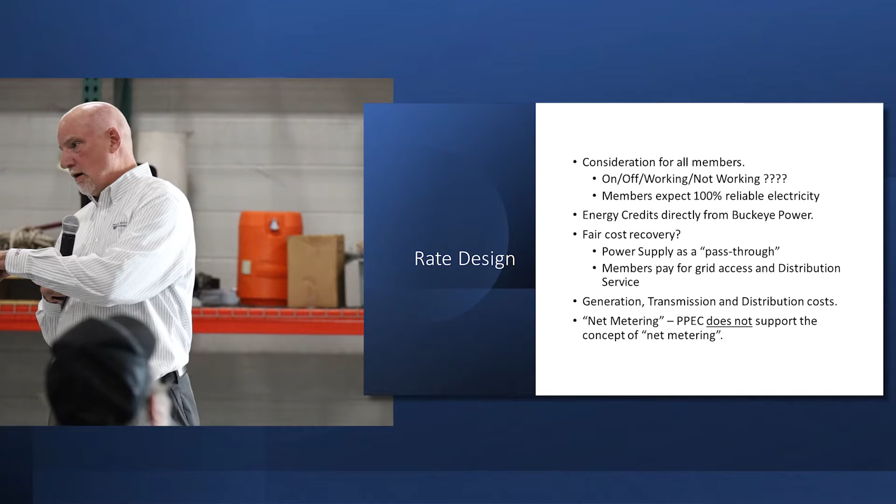Okay, so we'll get into a little rate design philosophy. First thing is, when we're talking about rates, we have to think about all the members, not just members that are large power users, small users, people that want renewable energy, that don't want renewable energy. We have to think of everybody, right?

One of the things we have to consider is systems like renewables, they're on, off, working, not working. That really doesn't impact us because we have to have connection and supply regardless. Because you want your power on 100% of the time, whether it's your own renewable energy or energy from us. So we have to be available and ready 100% of the time, and we have to have the capacity 100% of the time, which means we have to have a transformer sitting out there that's energized, ready to serve your home. We have to have a substation that's receiving energy, ready to supply your home. So that's the first consideration when we're designing rates — we have to be able to meet your needs whenever you need it, doesn't matter how much.

If your units are running, say you're generating some solar and using it, you're buying less from us — well, when the sun goes down, your usage may go up. We have to be ready to supply that all the time, whenever. You may take your unit offline to do some work, we have to supply that, we have to be ready. So we have to have our system capable all the time.

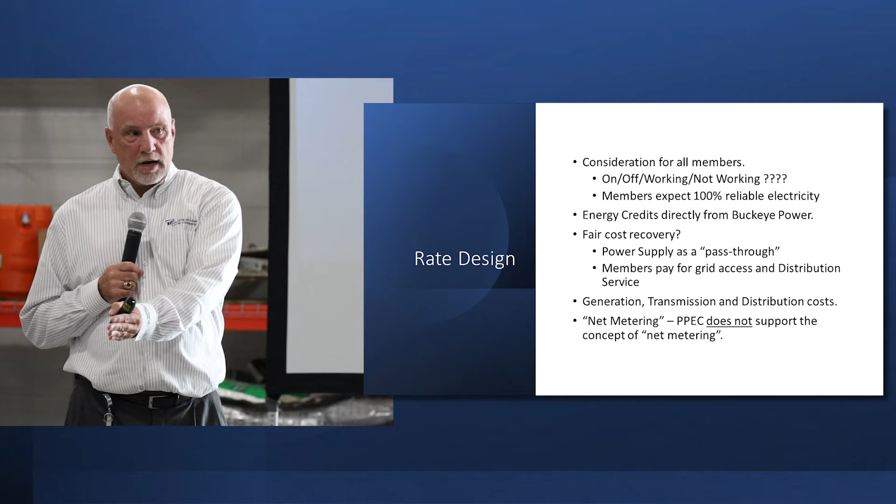Again, when we talk about fair cost recovery, when we look at the electron, the actual electricity that you use at your house that comes from Buckeye, we don't look at that as something we want to earn margin on, because we're not building to replace that. What we want to earn margin on is the distribution side, which is all of the facilities from our substation to your house that we use to serve you. And again, that's got to be available 100% of the time whenever you need it, so we want to have our margin because that's the equipment that wears out over time.

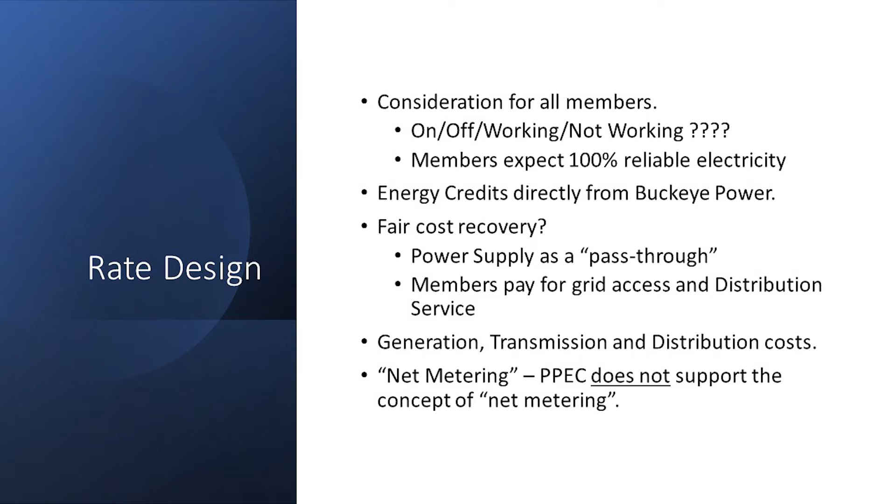That's the poles that after so many years have to be replaced, that's the wire that has to be replaced. There's millions of little pieces of hardware between that generating plant and your house that fail every day, and those have to be fixed, they have to be replaced. We have to have a systematic maintenance program to replace and upgrade that stuff before it breaks, hopefully. So that's what the service charge on your bill is for — that's what that recovers. The energy then just becomes a pass-through.

So whatever we pay Buckeye is what you pay — that's our long-term goal. If you look at your bill, several years ago we separated it out into generation, transmission, and distribution. It works out about 70-30: the generation and transmission components are roughly 70%, maybe 65% depending on your usage, and the distribution cost is 30-35%. That's roughly how it works, but you can look at your bill.

Net metering, we do not support that. That concept has been out there a long time, for as long as renewables have been out there. Basically what net metering means is the meter runs forward whenever you're buying electricity from us, and runs backwards whenever you're generating power. So in effect, your meter gets decreased at the actual cost to us, which is not the credited cost you get back. The net metering is actually at the full retail rate instead of the wholesale cost of the power, which would include all the distribution costs we're talking about in that credit. That's why we don't support it.

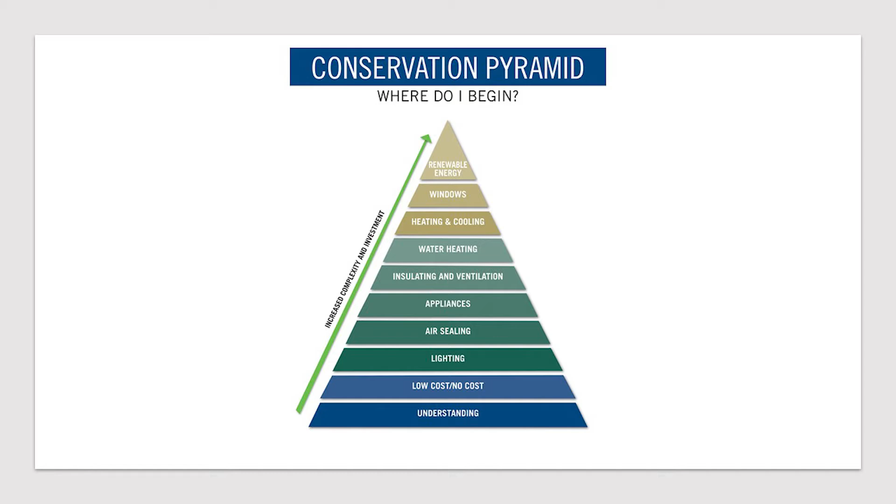At any rate, what we have to understand here is that there is a tremendous cost when you don't follow these steps in order. So the big thing is try to do what you can in this order, low cost, no cost, all the way up to more expensive. Really, on the heating and cooling system, you could save 20-30% on your electric bill a year just by upgrading that.

So just think about those things first, and you could see a return much sooner than putting in windows in your new house, or renewable energy. Okay, so that's just, I wanted to start down at the foundation level of what this conservation pyramid means and how we're going to go through these slides.

Okay, so the NREL, the National Renewable Energy Laboratory, did a really good study in early 2000, published in 2006. This chart is showing by state a comparison of solar power potential — how good is solar power in each state. The sun index is defined as an index of the amount of direct sunlight received in each state, accounting for latitude and cloud cover. The amount of direct sunlight was derived from numbers provided by the National Renewable Energy Laboratory Renewable Resource Data Center. The sun index was calculated as the average number of peak direct sunlight hours per year from 1960 to 1990.

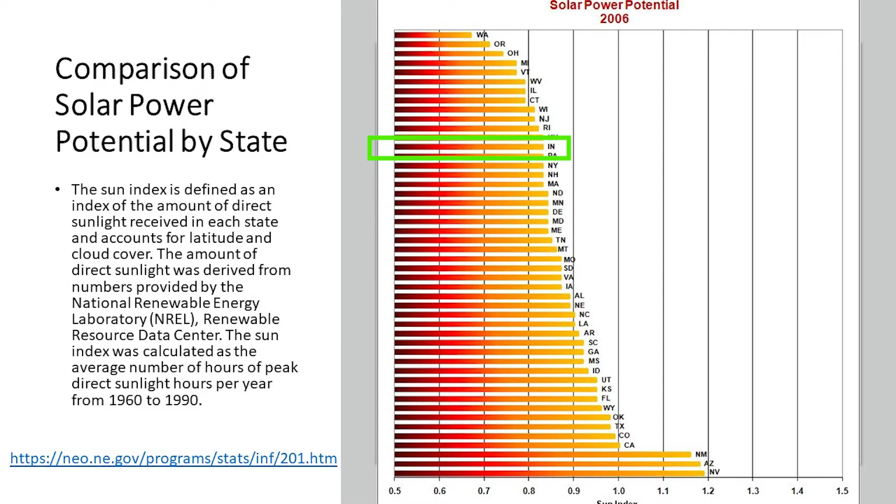And this is important because I want to show you, right up here, the state of Ohio in terms of solar potential — it's the third worst state of all 50 states in this country. And Indiana is, I think, the 13th worst. So it's just not great. There isn't great sun in this area, in the Midwest in general. Why am I bringing this up? Well, how is solar viable in our area? Why are people putting in solar panels everywhere if the solar potential is not very good in Ohio?

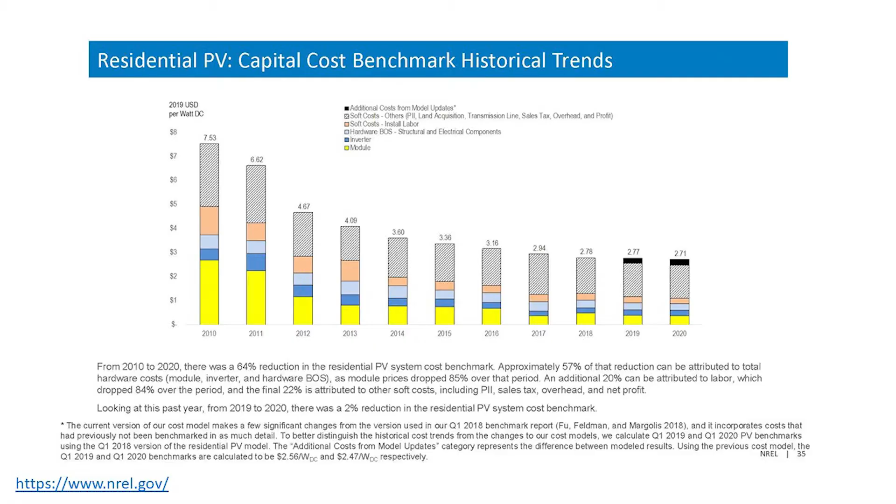Well, it's pretty simple. Over the last 10 years, the cost of solar installations in general has gone down 64%. In 2010, the cost per watt installed was $7.53. Fast forward 10 years later, it's about $2.71 per watt installed. Today it's a little less than that — in our area they range between $2.40 and $2.50 per watt, depending on your application and whether it's residential or commercial. Generally speaking, the larger you go, the more cost effective it is. I just wanted to show you this graph because it shows how far we've come in 10 years in terms of cost. That's why it's starting to make a lot more sense in our area in terms of cost versus savings, and the return on investment is worth it.

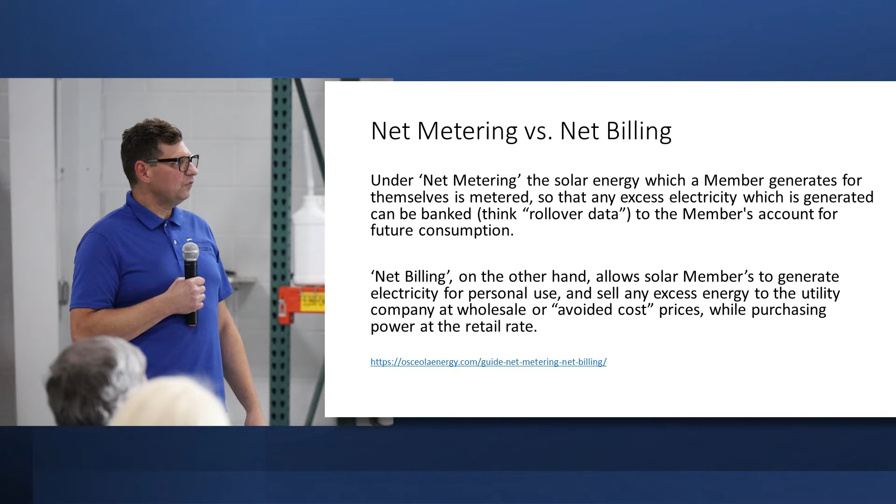Okay, so net metering versus net billing. George was speaking earlier on net metering. Under net metering, the solar energy a member generates for themselves is metered so that any excess electricity generated can be banked — think rollover data on your cell phone plan — to the member's account for future consumption. Well, the co-op doesn't do that, that is not our practice. What we do here at the co-op is net billing. Net billing allows solar members to generate electricity for personal use and sell any excess energy to the utility company, us, at wholesale or the avoided cost, which is the Buckeye Power cost — we'll go over that in a minute — while purchasing power at the retail rate. I'll explain that a little more going forward.

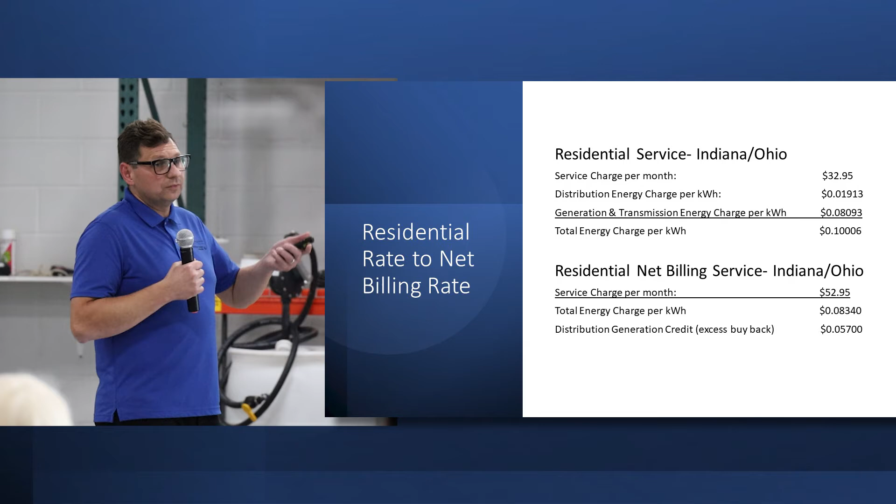So this slide is residential rate going to a net billing rate. I'm going to assume everybody here is on a standard residential rate with Paulding Putnam Electric. If you are, your rate looks like this, the top portion. The service charge per month is $32.95, that's a fixed cost — it doesn't change from month to month. It's there every single month whether you use 1 kilowatt hour or a lot of kilowatt hours. That cost is essentially a fixed cost to pay for our system, equipment, material, that kind of thing.

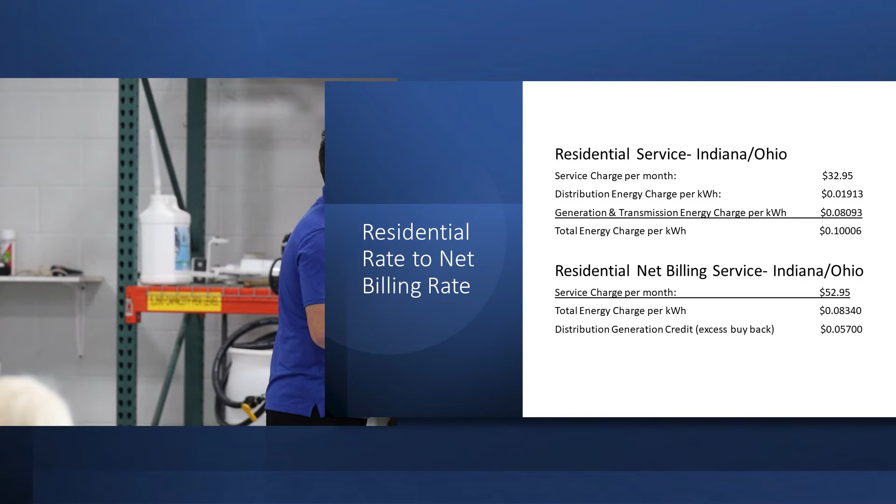And then below that is our distribution energy charge per kilowatt hour, it's less than 2 cents. And then our G&T energy charge is 8 cents. Combined, we're paying roughly 10 cents per kilowatt hour — you're all paying roughly 10 cents per kilowatt hour if you're on our standard residential rate. Now, if you go with a solar system, you'll go to our residential net billing rate, where the biggest differences are: the service charge goes up 20 bucks to $52.95, yet the total energy charge per kilowatt hour goes down to 8.3 cents from 10 cents.

And any excess buyback is at 5.7 cents. That's the avoided cost, that's what would come back onto our lines. That's what Buckeye Power would buy back from you guys.

So this is a good snapshot of what it looks like now, and what it would look like if you do go with a solar system.

This is very critical, the reason why I'm explaining this is because I would say 9 out of 10 solar customers that we connect don't have a clue that this is happening. They just don't. So they're surprised, I guess.

It's no loss, you're not gaining or losing anything. It's the service charge goes up because there's increased responsibility and increased cost. And then what we did was we just lowered the kilowatt hour charge essentially, so it's essentially flat.

Okay, this next graph is solar usage patterns. This is a 24-hour period here. This graph here is depicting a 24-hour period of solar output, this blue line, and home usage, this orange line.

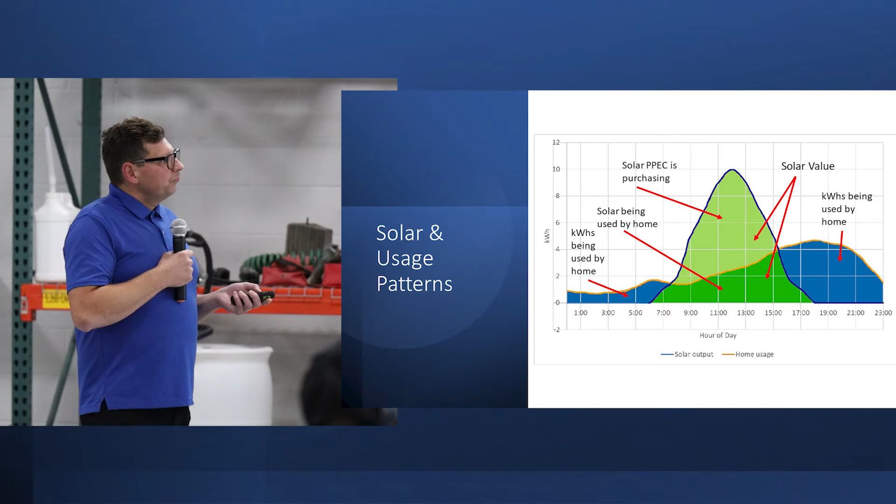So this is important too because my next slide will explain to you how the net billing portion of how your system pays for itself. I'm going to explain.

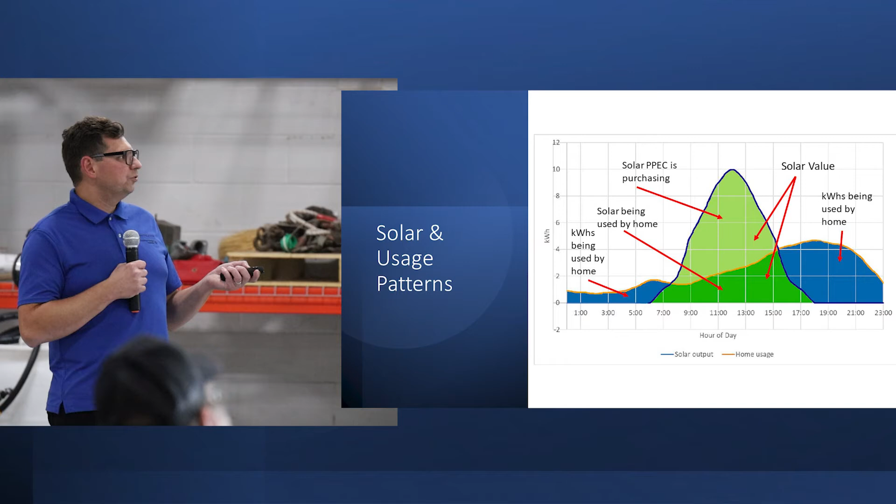So when you use power from the co-op, this blue portion here is using power from the co-op. And then when the sun starts to come up, you can see solar being generated right here. And then this dark green part, where your home would be using electricity, your house is using that power from your solar system that you are generating.

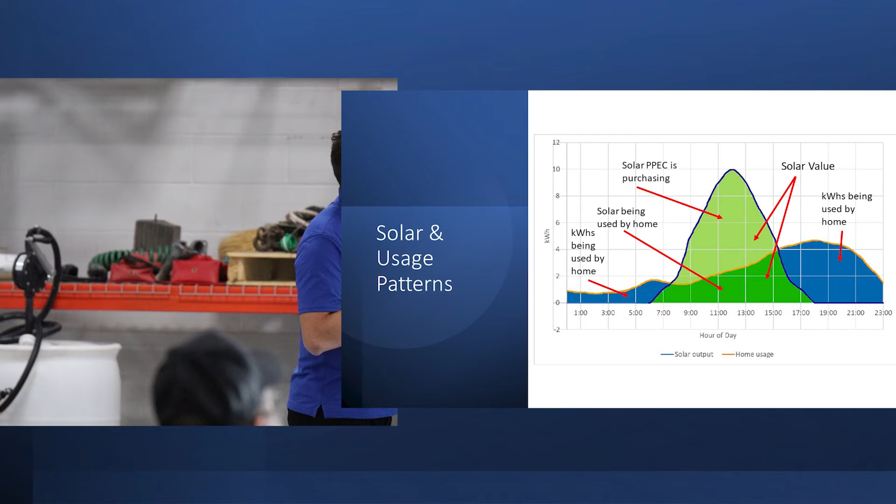So if you are actually generating more than what your home is using, then the solar, this is the solar that PPEC will start purchasing.

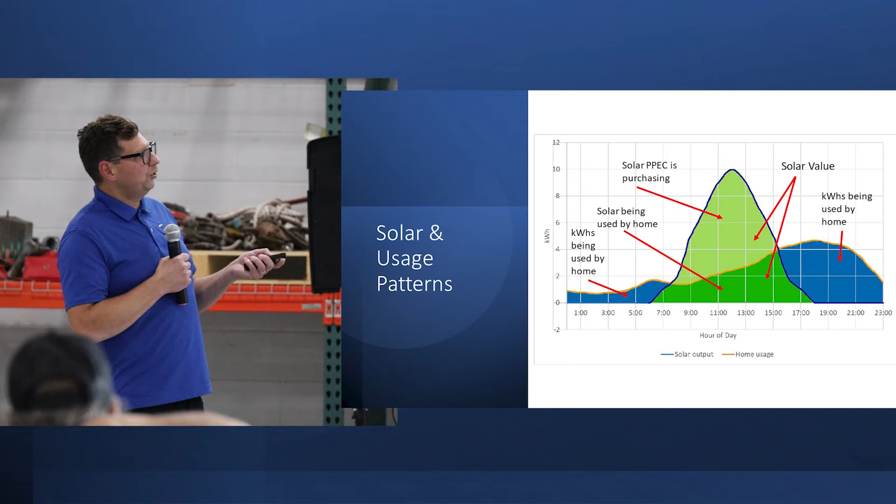These right here, this graph is showing power right here during the day. That power is coming back onto our system. All the while you are using all of the power that your solar array is generating.

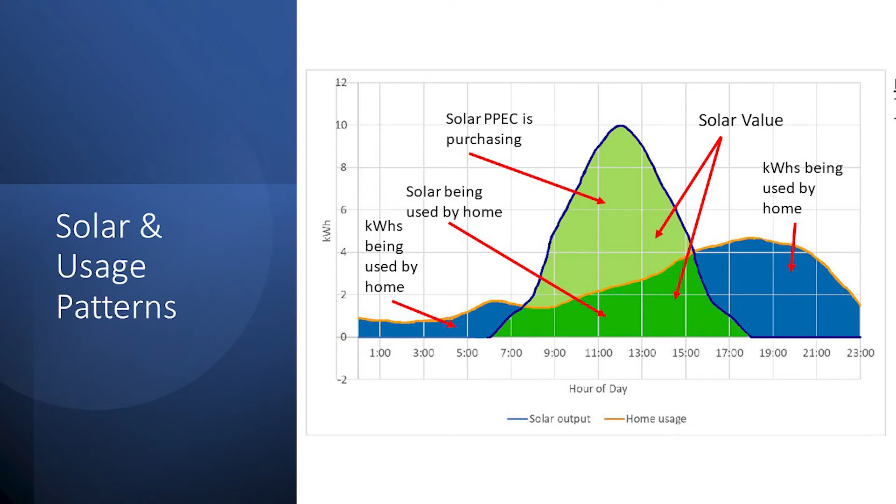When the sun starts to go down, kilowatt hours are being used from the co-op right here in blue again. So this is important too because I'm going to start talking about paybacks and how that system can pay for itself. So this is a typical scenario for net billing with Paulding Putnam Electric.

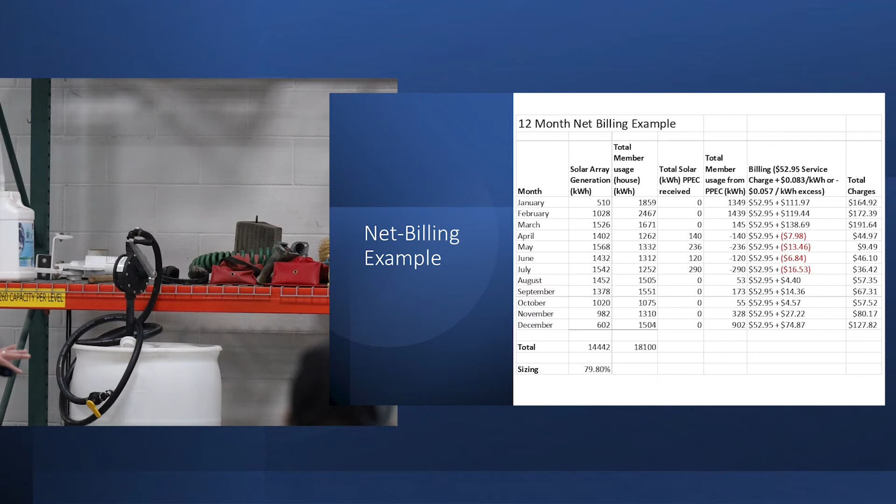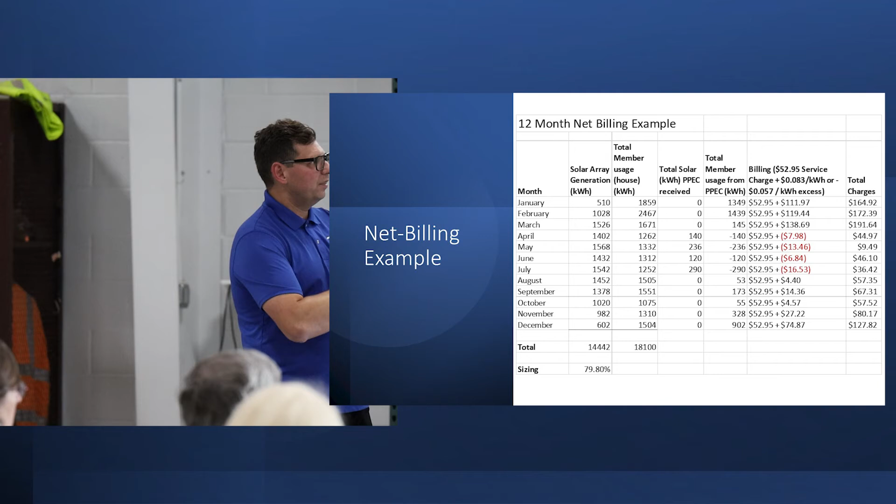Okay, now this slide might look a little intimidating, or it might look like a lot of numbers, or you can't see it very well, but this is a net billing example of a 12-month electric consumer, a member of ours, that would have a solar array system, for example, connected to us, obviously built at their home, taking power from the home and putting back onto our grid.

So, basically, if you guys can follow me here, this row right here is a theoretical about 12 kW system that has been installed on this member's home.

Okay, these are actual kilowatt hours that the house is using. So for the month of January, your theoretical generation, your solar system that you have outside your house, in your yard, generated 510 kilowatt hours. All the while, the house used 1,859 kilowatt hours. Okay, you see that second row?

Well, the third row is the total solar that you sold to Paulding Putnam, or that we received from you, of over excess generation, which is nothing, because you actually netted 1,349 kilowatt hours. So you used 1,859, your solar system generated 510, you used all of that up, and it netted to 1,349 kilowatt hours, and that's what you paid for.

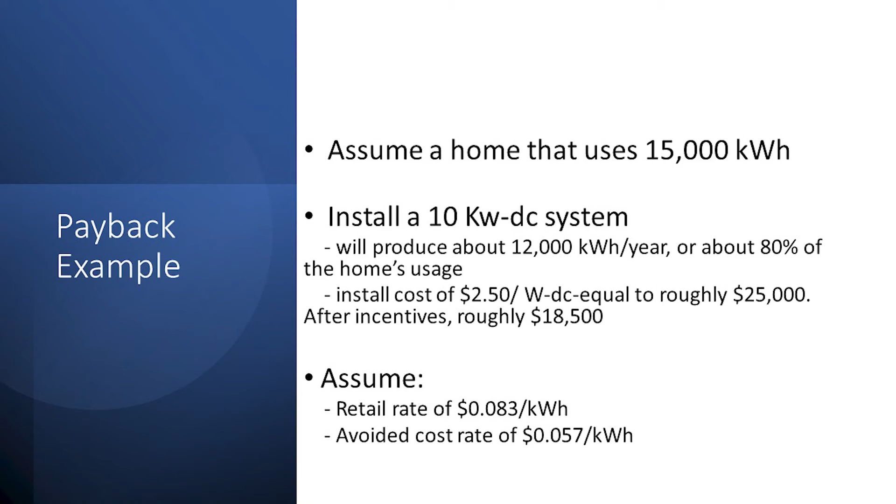So if that 10 kW system I just described at a 15,000 kilowatt hour a year home, if 7% of the solar kilowatt hours are sent back to the grid, then this is what you should expect in terms of solar values.

If we go back a few slides, this part right here, this is what's going to be paying for your system. This is your solar value. 7% of 12,000 kilowatt hours is 840 kilowatt hours, credited at 5.7 cents, that's 47.88. 93% of the 12,000 is 11,160, valued at 8.3 cents, which is 926.28. The total annual solar value is right here, under $1,000.

So if you do simple payback, it's 18.9 years on an $18,500 system, with just the 26% tax credit. I'm not familiar with what other incentives there are, if there are any others, but this is just a simple payback example.

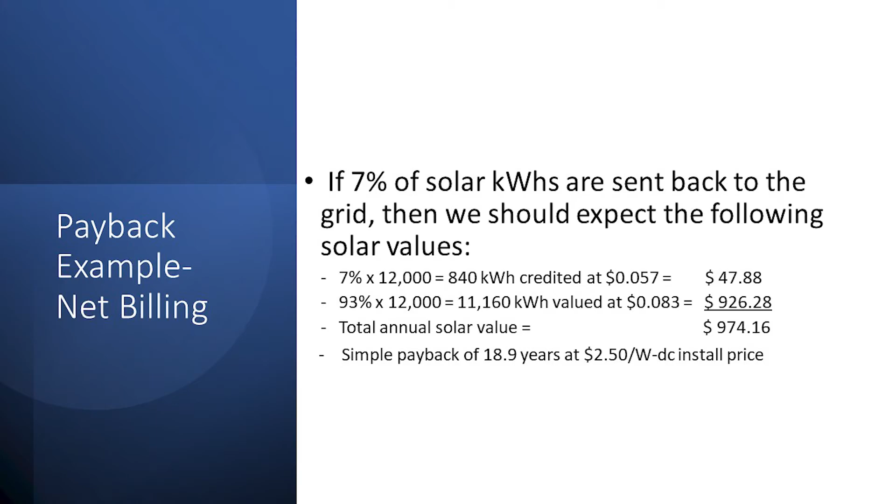So this is what you should expect a system to generate. Let me go back a second here. Your objective should be to use all the kilowatt hours that your system generates, because it is valued at 8.3 cents, not 5.7 cents. That return will happen much more quickly if you use all these kilowatt hours and not sell them to us at 5.7 cents. That's the moral of the story here.

So, step-by-step process if you do want to go with this system. Before choosing a solar system, be sure your home is as energy efficient as possible. If you can reduce your energy costs at your house 30%, 20% by implementing energy efficiency upgrades, like having me come do an energy audit and tell you how and where to improve your home for 20% or 30% savings, you can install a system 30% smaller. When you're talking thousands of dollars, that makes a big difference. It just makes all the sense in the world.

So investing in energy efficiency provides a faster return on your investment. Things like we were talking about on that pyramid. Almost every time, insulating and air sealing, lighting, that stuff will make a return on your investment much more quickly than a solar system. You will reduce your overall energy use, and you may reduce the size of the PV system you put in.

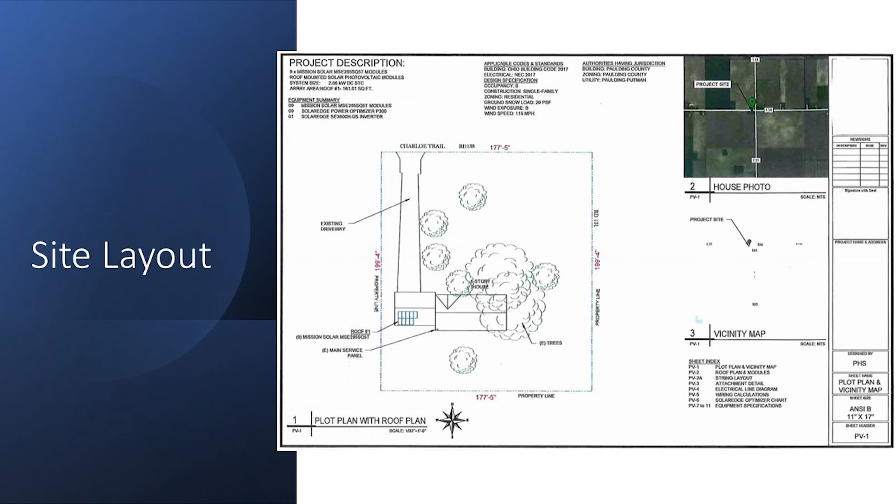We want to see where the solar panels are and how it's going to get interconnected. It doesn't have to be like this, it doesn't have to be an AutoCAD drawing. If you're doing it yourself, you can draw it on a piece of paper. We just want to know the proximity of where this is going to be, the number of panels, and where your meter is located and how you plan on interconnecting to it. Another example would be this layout as well. You can see this is a house, I'm assuming that's a garage, and you can see where the solar panels are at.

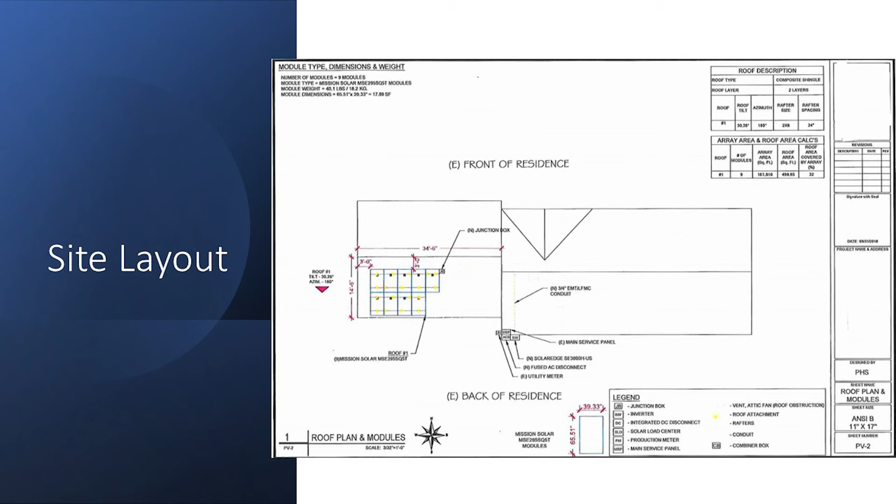Down here, that's where the meter and the disconnects and all the integrations are happening. The next diagram we want to see is how you have this all designed as far as interconnecting. How is it wired up?

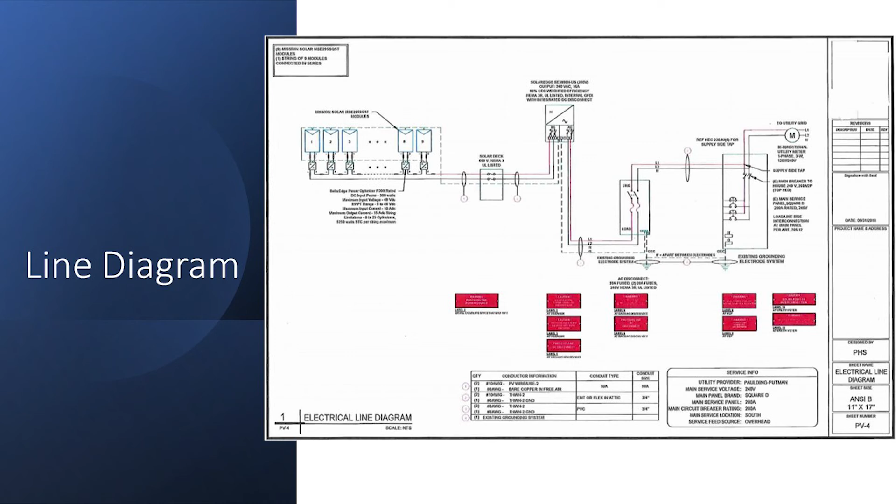Gotta go back. You can see we got the solar panels over here. It's going to go into an inverter, and then eventually to a disconnect, and then into your panel, and then back to the meter. We want to make sure that it's wired properly, and I'll get into that detail in a little bit.

But these are some of the things that we were inspecting in the application. You can't really see it, but these little red squares, that's labeling. I'll discuss that here in a little bit. Labeling of what everything is out in the field or at your home is very important.

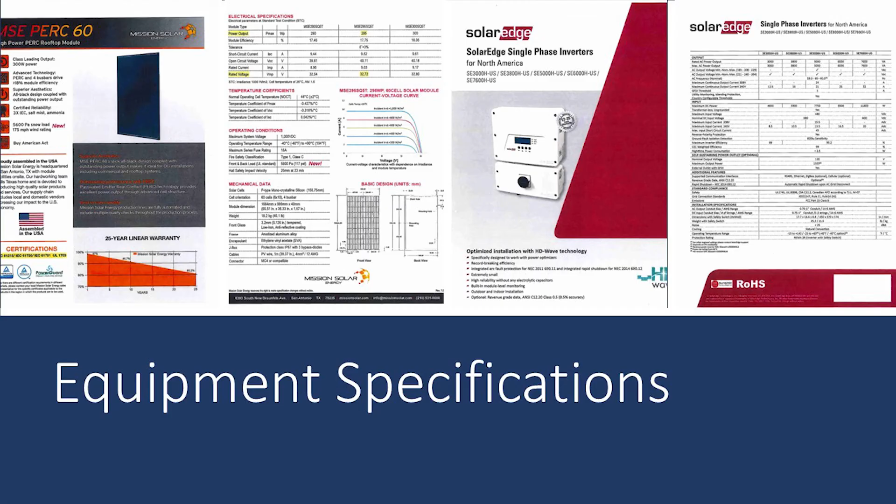Next thing in the application, we do want to see what manufacturer you got on the solar panels. We don't typically care what brand it is, but we want to know what the wattage is, because that can dictate what size solar array you have out in your field. If you have 20 panels and they're rated at 300 versus 425, that's a big difference. So we just want to know what kind of material you're using.

Same with the inverter, what converts it over and phases it together so that it can be backfed on our lines. So we just want to look at the specifications of the equipment.

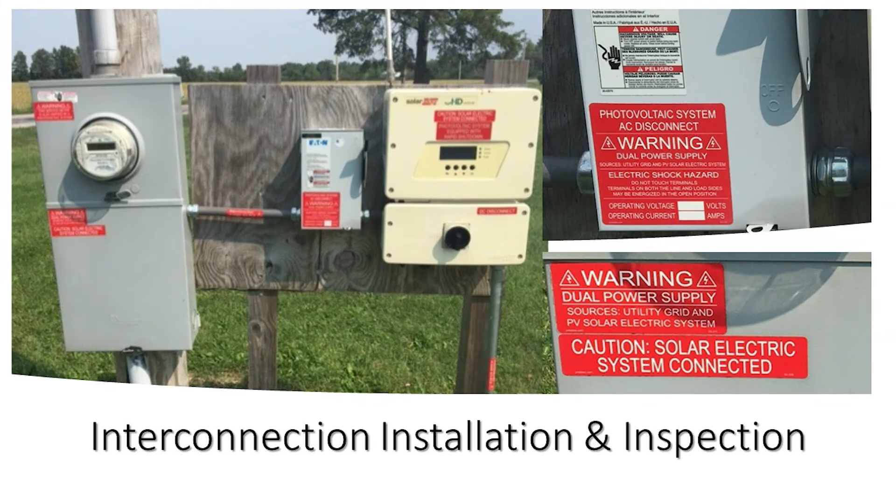All right, so let's get into what it actually looks like in the field. This is just one example. There's many different ways of wiring it up. This is an outdoor application. You can see there's 3 main components that we look at on it besides the solar panels.

So the first one is your inverter. That's basically what inverts it from DC to AC and makes it more usable power and phases it into our grid.

So one thing that a lot of people don't realize is if you don't get power from the utility, okay, these are not a generator. This is not a battery backup system. This is not a generator system. So you actually have to have power to produce power.

You can't just take two wires and stick them together and expect them to phase together. That's what this inverter will do. It keeps everything, the sine waves, all equal. It keeps everything solid so that everything works in harmony. If you don't have that, you just got a big arc. Okay, so that's what this little box here does.

It keeps everything stable. It's actually more of a monitoring system for your entire system. You can see what the DC voltage is compared to what the AC voltage is coming out. If you want to get more technical, we can talk more.

The next piece of the device that we're really concerned about, and is very important to us, is a service disconnect right next to our meter. So in this application, you got the inverter, you got the disconnect, then the meter base. But we really want that service disconnect within viewable distance, within 6 foot of that meter. Now, for several reasons. So that service disconnect, so I'm going to jump ahead here.

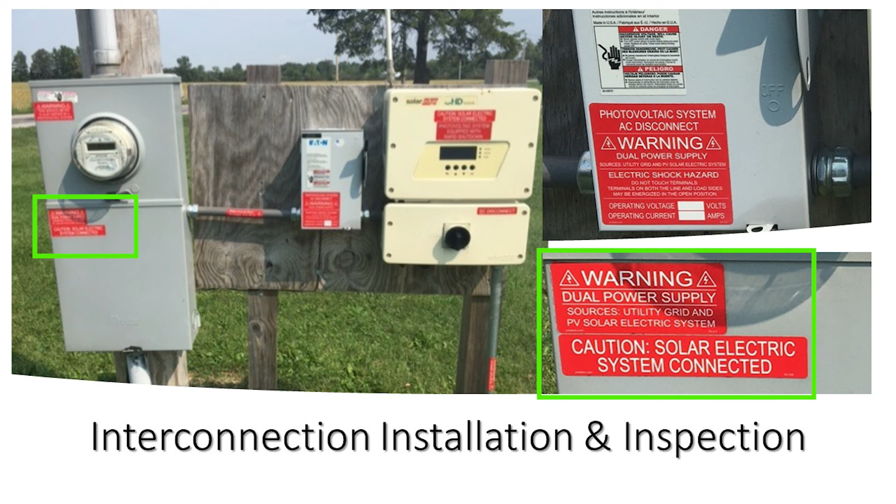So let's look at this labeling. Labeling is very important. We want to know exactly what everything is. So this label here is the same label that's on the disconnect. And when you look at the meter, it's saying that there's dual sources, there's another source of power. If there is ever a fire, there's a disconnect down below that meter that the fire department can shut it off. But will they know that there's also a solar panel?

If there is an outage, our linemen will go through and they'll actually throw that disconnect and pull the meter. We'll do some safety functions. But George talked about liability. And when you do have these solar fields out there, you are taking some risk.

If your inverter does not shut down when you lose power, you do not want to be producing power out of the lines. Let's say there's a vehicle accident and the power is down, the power lines are on the ground. Now, our outage, our breakers open up, so people assume that it's dead. Our guys never assume anything's dead. They take safety measures just to combat that so that they don't have any issues.

You're taking a risk if your solar panels do not disconnect from the system. A transformer is stupid, there's no electronics to it, it doesn't care what direction electricity is flowing through. Power comes in off the primary lines at 7,200 volts and we transform it down to 120-240. A transformer doesn't care which direction power is going. Your solar panels can produce 120, 240, it'll go through the transformer and step it up to 7,200 volts. It doesn't care. That's why we take measures with inspections to make sure your system is working properly, so if there's an outage it shuts itself off. That's the liability you're taking. If there's an issue and you're putting voltage out there and someone gets hurt, you are liable. Just be clear on that.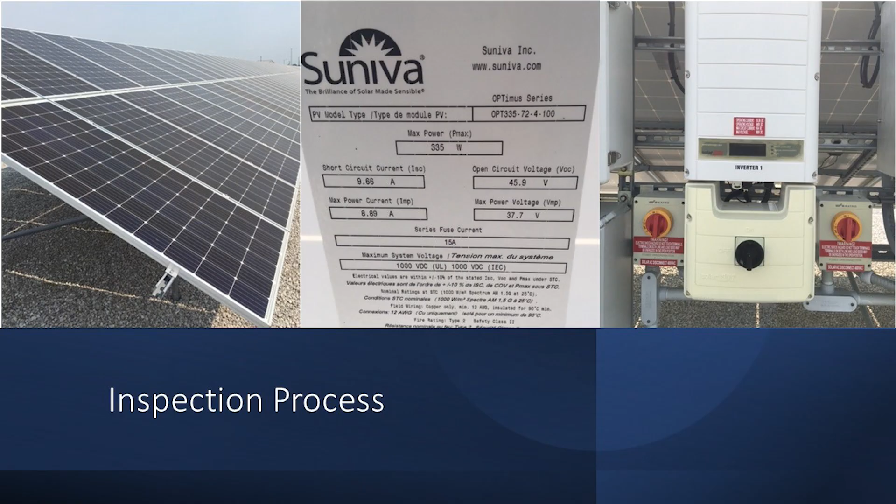When we go out for inspections, we're going to count the solar panels. We want to know how many panels you have versus the application, so everything is installed properly per what you applied for. We also want to look at the wattage of the panels. Solar panels all look alike, they don't make them red or blue, they're pretty much the same color, so the difference is the wattage. The wattage can range by 100 watts per panel and you don't even know what it is. We will look at the ratings of what you have installed.

We also want to check if your inverter is hooked up. When we're out there we're going to see that the inverter is producing electricity from the solar rays, and we want to see that it's backfeeding. So when we do inspections, we're not going to go out at a time like now where it's kind of dusk, we want it actually producing so we can make sure it disconnects.

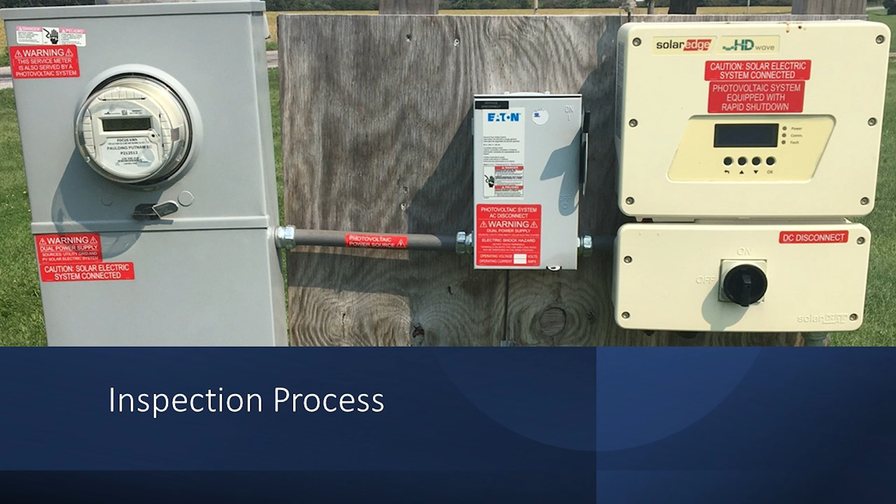In this inspection process, we will look at the inverter, get it running, make sure it's producing. Our meter tech or myself will simulate an outage, pull the meter, put a voltage meter on it, and disconnect the service. What we're looking for is making sure that the system disconnects. Very important, safety is a big culture for us, a big concern. That's one of the key things we're checking on your solar array before we put it in commission.

Here's a quick video. When you get a net billing meter from us, there's a lot of questions on which register the solar field is producing onto. We have what's called a dual register meter, with a delivered and a receive on it. Remember, this meter is owned by Paulding Putnam, so it says Paulding Putnam right on the meter. From that, we receive kilowatts from you, that's the receive on there.

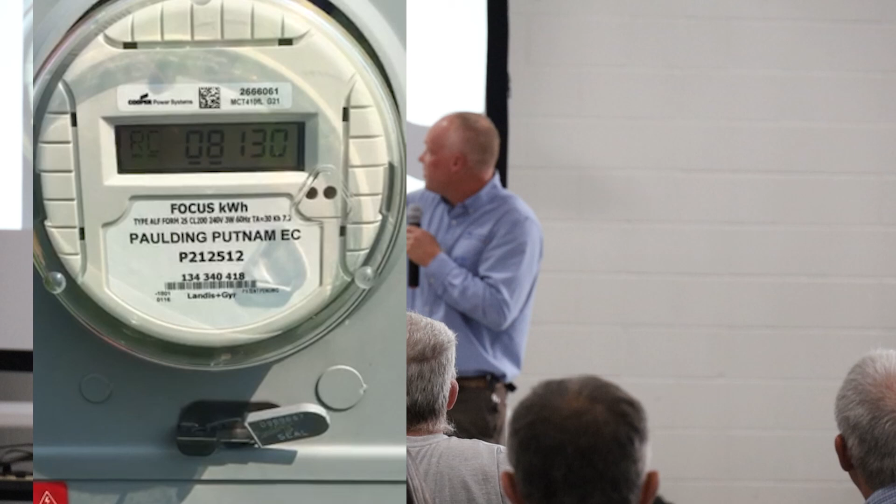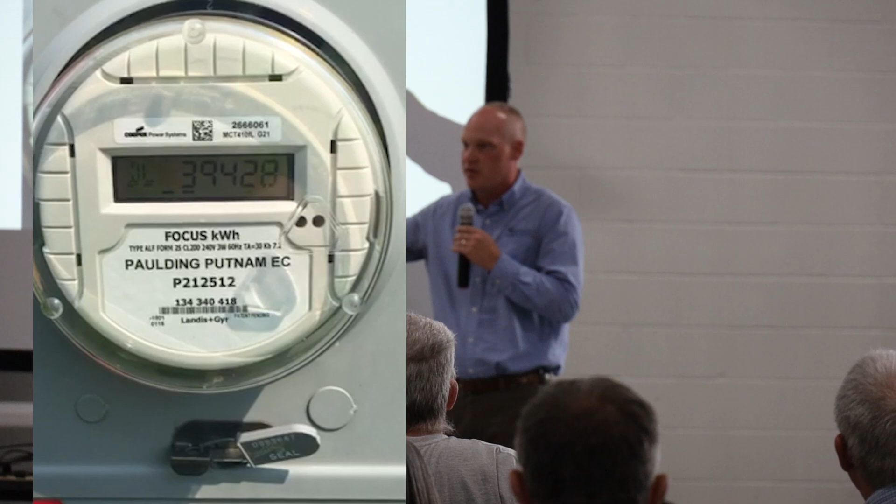You'll see it says RC. Delivered is what we delivered to you, so a lot of people get that mixed up, delivered and receive. Just keep that in mind. It will flash delivered, receive, and you can see in this corner, DL means delivered, RC is what's been received to us, so that's what the solar arrays have produced. Also in this one it's hard to see, but the dial is moving backwards, showing the flow of electricity. At this current moment when this video was taken, those solar arrays were put back onto our system.

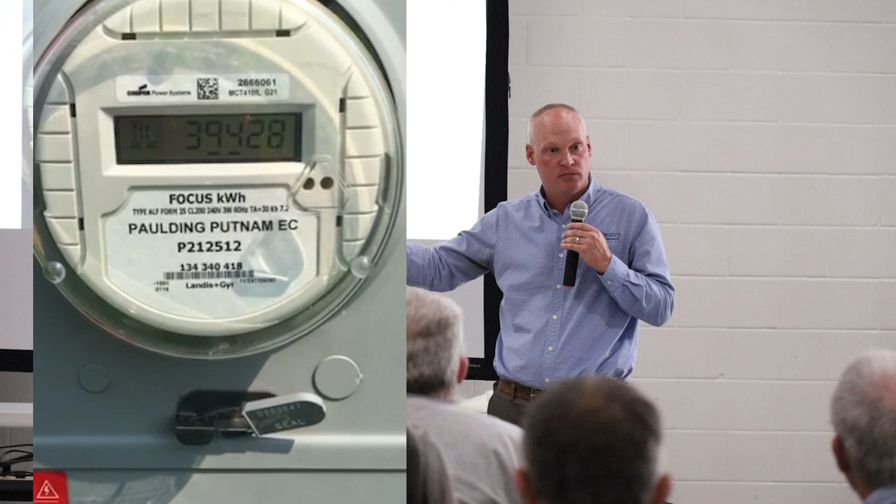If you want more information, you can always visit our website. One of the reasons we're having this session is we have nothing to hide, we have a bunch of data. Let us help you with your data and maybe we can match it with what we have on our panels and help you make a good decision. Not saying whether you should do it or not, it doesn't bother us at all, but we just want you to make a solid decision for yourself.